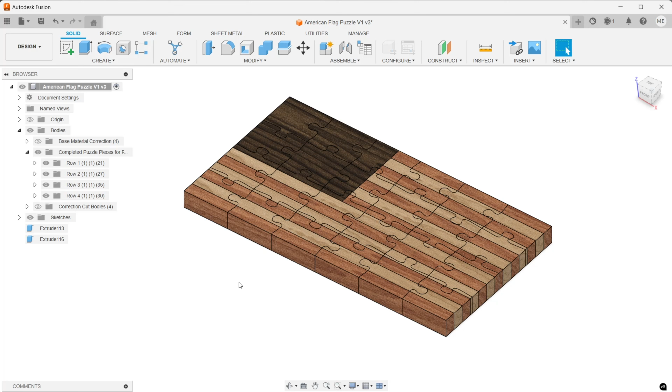So let's go ahead and get started, we'll jump right into it. I'm going to take the top face of this material and build a box, then extrude that into a solid that I'm going to model against, replicating this minus all the other components that make up the American flag.

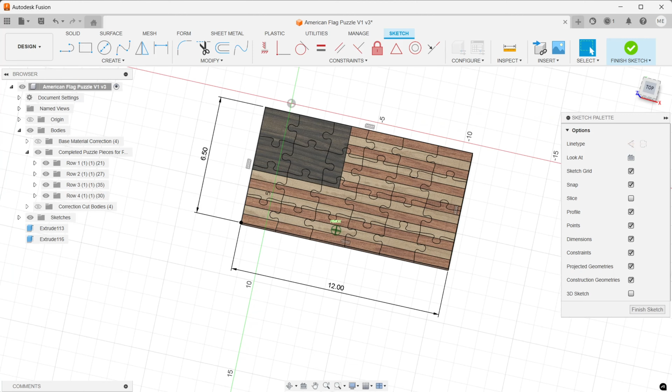I'm going to hide the American flag now and keep my base sketch, then extrude this down. Right now I'm gauging my overall thickness to be 3/4 of an inch. Hit OK on that.

This will be my sanity check on replicating this without touching the rest of it. So let's go to Form - there are multiple ways you can do this in Fusion, but this is the simplest, easiest thing I can do, and I've gotten really good results with the mesh it produces.

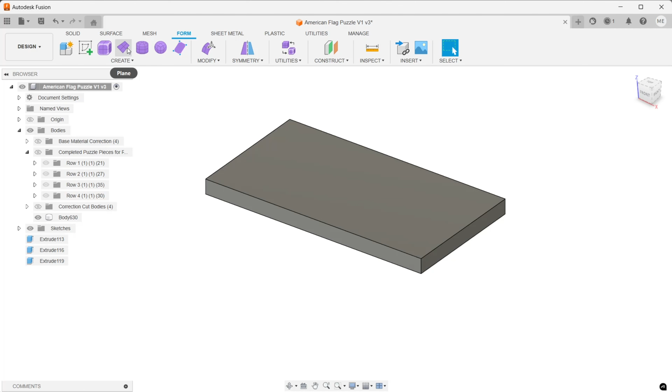So what I'm going to do is create a plane and select that top portion of the face, then build my overall dimensions of the box, and this automatically produces a grid system. You really want to keep this simple, because the more grids and points you have, the more complex and uneven things get when you start pushing and pulling - it's just harder to manage. So I'm going to bring this down to 5x5, which gives me little boxes across this plane that I can manipulate over time. That actually looks pretty good, so we'll hit OK on that.

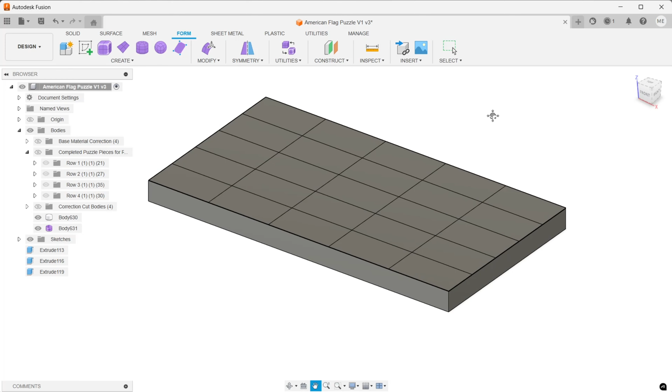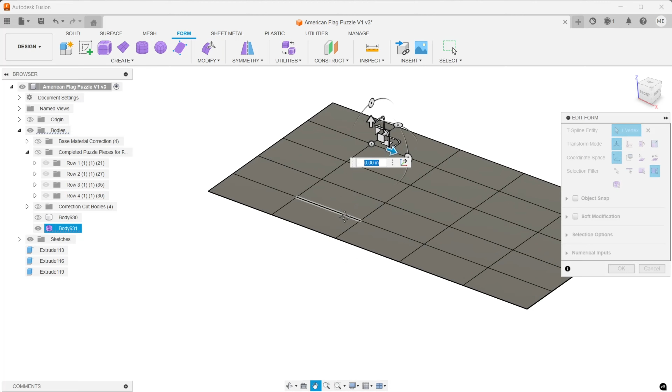Now with the edit form function, you can edit an entire square, an edge, a point, or the entire edge of this. Let's go ahead and hide the body we made previously, so now we only have this plane to work off of.

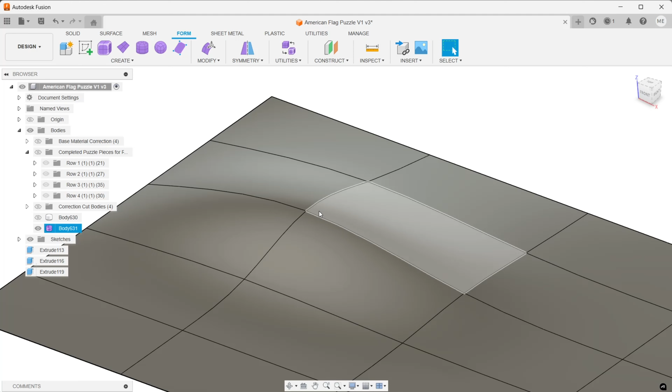So you can push and pull - there's a whole laundry list of edits you can do. Just know that every time you make an edit and release it, it saves that individual change. So this last operation where I pushed it down a little, if I cancel, it keeps the last edit I did within that edit form I just completed. Best thing to do if you don't like it is hit the edit undo button - you can reset everything and continue on with your edits.

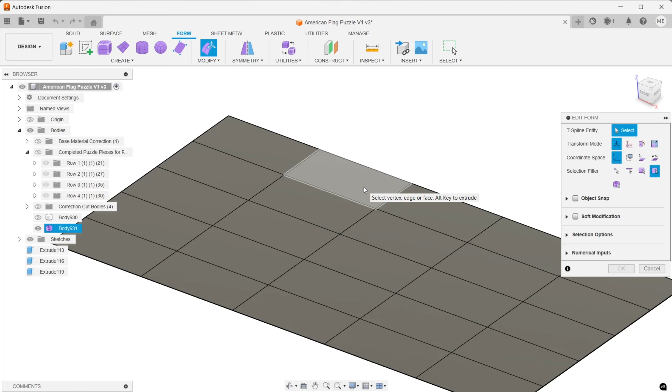So let's start manipulating this. I like to skip every other line - if I'm going to have a valley here that comes up into another valley, I'll edit this line and keep everything else the same. There are multiple ways to do this, you just have to play around with it. The biggest thing to keep in mind, especially for a wavy flag, is you have to keep it organic. You have to make it look like the wind is blowing the flag and the fabric is interacting with that wind. If you have too sharp of curves, too sharp of valleys or points, it won't look natural and will take away from the overall effect you're trying to achieve.

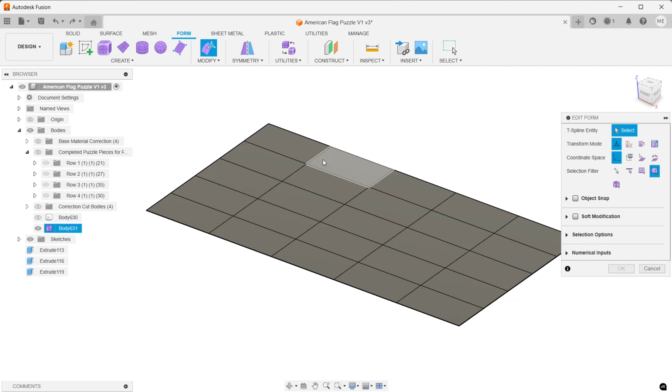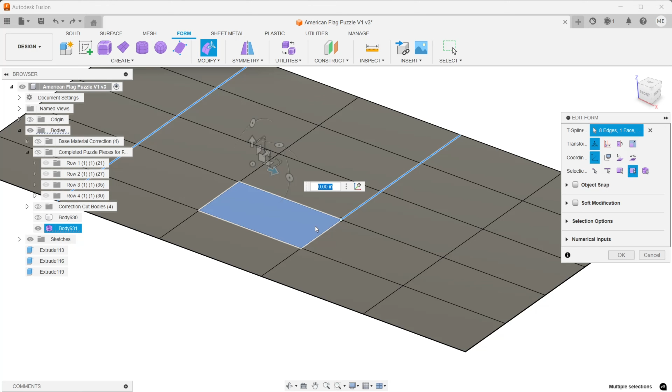So I'm really careful with the amount of edits I do here, but let's start with these two lines. What I'm doing, though you can't see it, is holding my shift key down and selecting each one of these lines. If you accidentally click a face or a point, you can click it again and it'll unselect it. That's all I'm trying to edit right now. I'm going to pull this down, but before I do that, I'm going to do my sanity check.

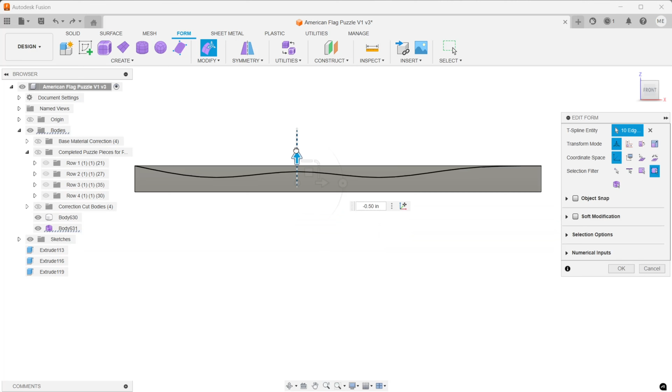And I'm going to look at it from the front view, and I'm going to pull this down so I can see my lines. And that is way too little.

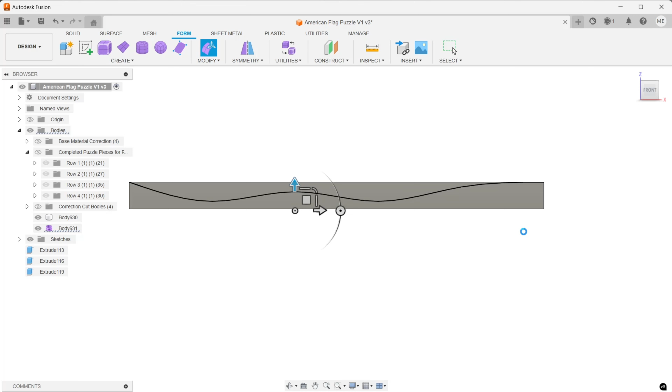Let's keep going down just a little bit more. A little bit more. I want to keep material at the bottom of this, because if you take too much material out of the base material that you're using, it's going to be really brittle. It's going to break, and you don't want to do that. You want to make sure it actually lasts. So always keep in mind the materials that you're actually going to work with in real life. You got to really pay attention to that.

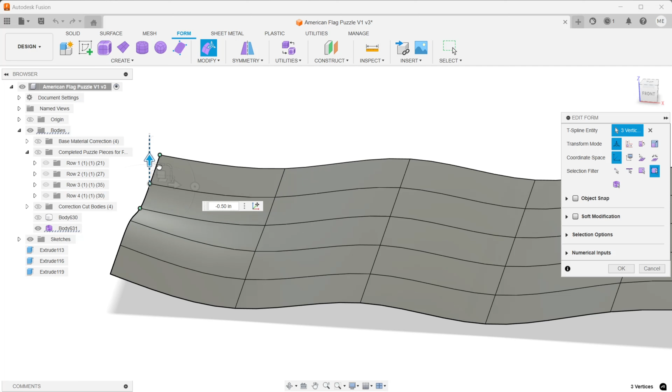All right, so I have just a really nice little curve that's going down and then up and then down. What I'm going to do is I'm going to end up moving these 2 points down, and we'll start getting this kind of effect where we want it. I'm going to bring this way down.

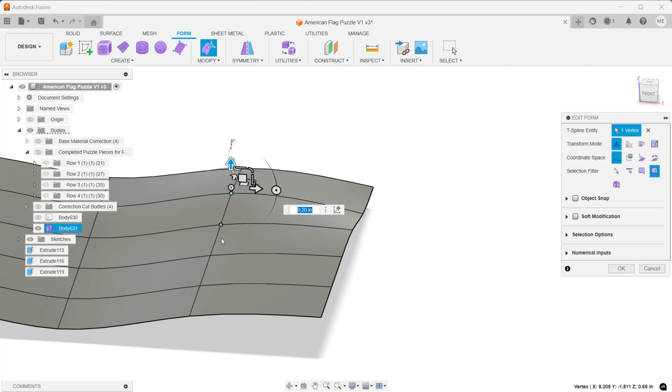Okay, I'm going to do the other edge. I'm going to modify these 2 points. Bring that down. I'm going to bring this up just a little bit. This and this are going to go down.

And you can start seeing that it's starting to look like something, but there's a lot of work that still needs to be done here. I'm going to take these 2 points and I'm going to bring these down.

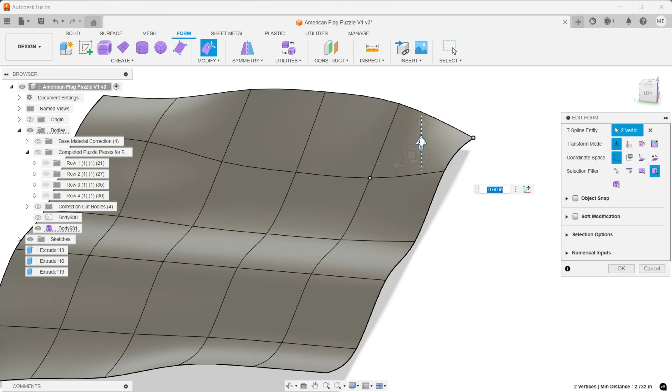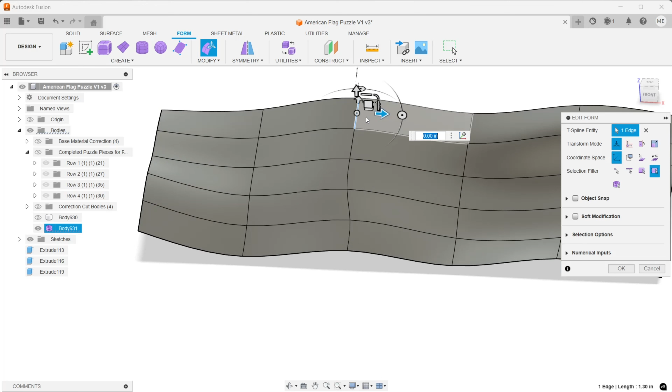Now what I'm going to do is I'm going to move this over to the left. I'm going to move this over to the left. What it's doing is just slightly changing that. Now, what I'm going to do is I'm going to add an additional line here.

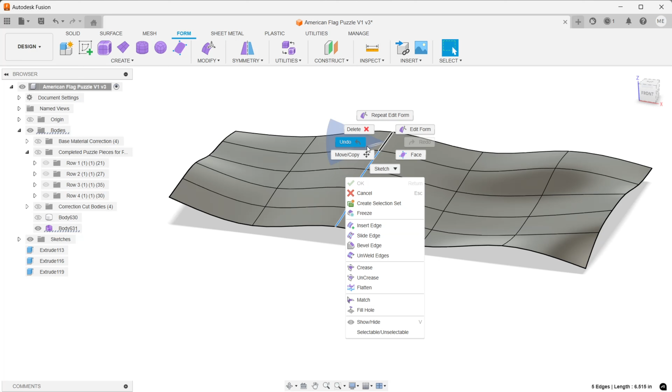Now what I'm going to do is I'm going to right click, and I'm going to insert edge, and it's going to insert another edge along the left side of this. Now you can adjust this, but I'm going to keep it all the same. 0.5 is perfect. Now it added an additional edge, and it's starting to even some of that stuff out.

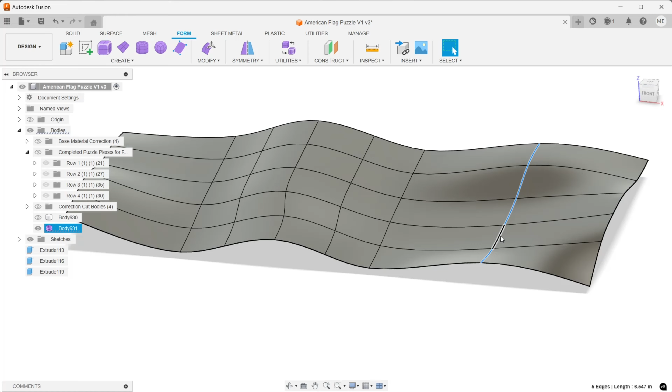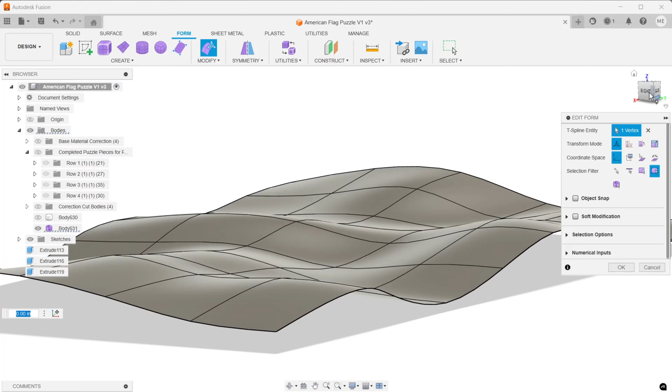All right, so I'm going to speed up the video a little bit. I'm doing the same process. I added lines, both horizontal and vertical, and just kind of kept playing around, but I made sure that profile that I put in on that plane was within that box. And that was really critical. So I was going back and forth, just doing slight adjustments, making sure that it had a really nice even flow between the peaks and the valleys, nothing too crazy. And yeah, honestly, it really only took maybe 30 minutes to kind of flesh that out.

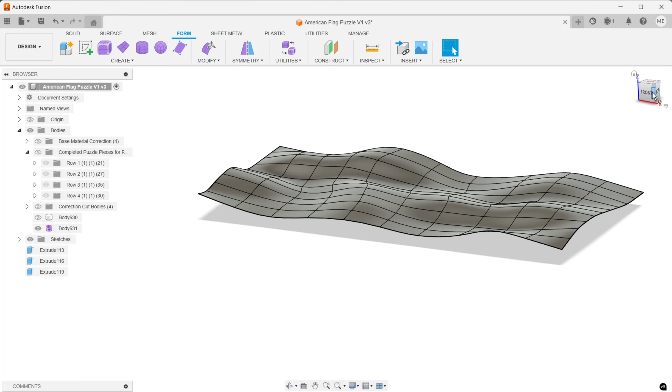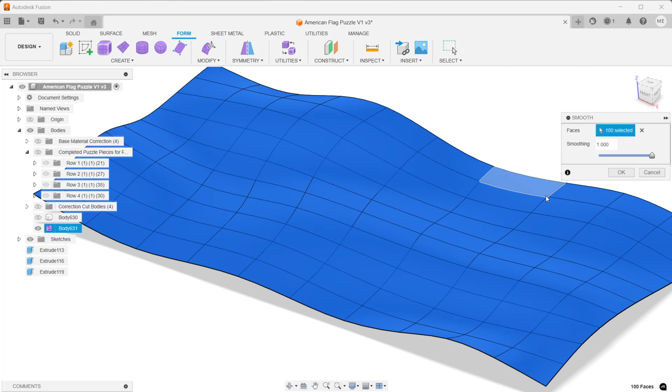All right, I am pretty happy with the movement that I got in here. So now what we're going to do is we're going to smooth everything out. There's still some pretty sharp edges here, but if you select everything and you go to modify, smooth, you can change this up. I'm going to go 1.0 or 1. And that got everything pretty smooth. I'm going to do it one more time.

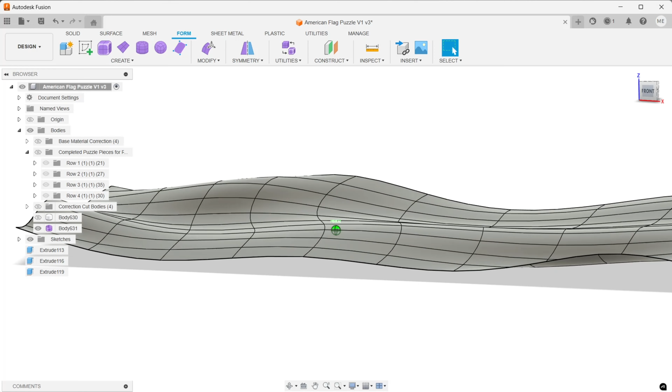Looks pretty good. Let's look. Starting to look pretty good. All right, so this looks pretty good. I'm going to go ahead and convert this, and we're going to convert T-spline to B-rep. Can't tell you what B-rep stands for. If anybody knows, just put it in the comments.

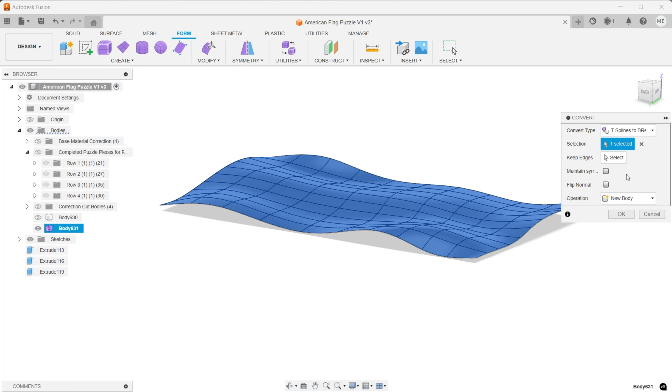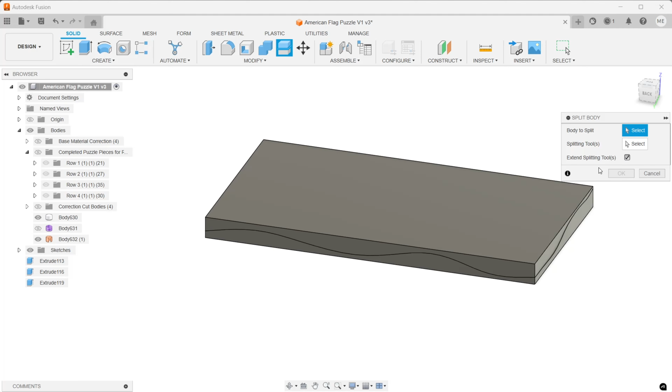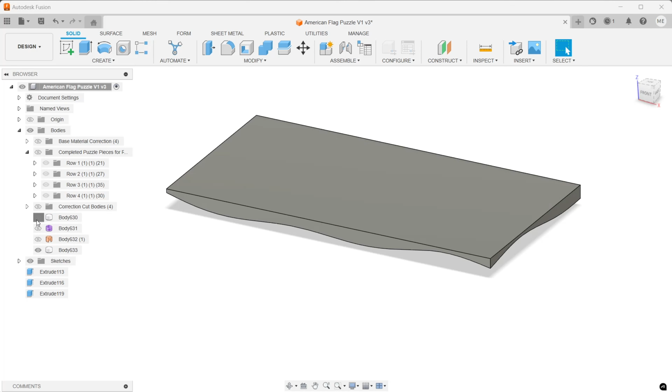All right, so now that we got it converted, I'm going to go ahead and I'm going to split this body with that. So I'm going to put that visible back again, and then I'm going to split body. Now, if this gives me an error, we might have to modify this just a little bit, but the body to split is this, and the splitting tool is going to be this mesh. Now, what it did was it sliced that along the plane, so I'm going to hide my mesh, and I'm going to hide that top portion. Now, I have my 3D profile, and that looks pretty good.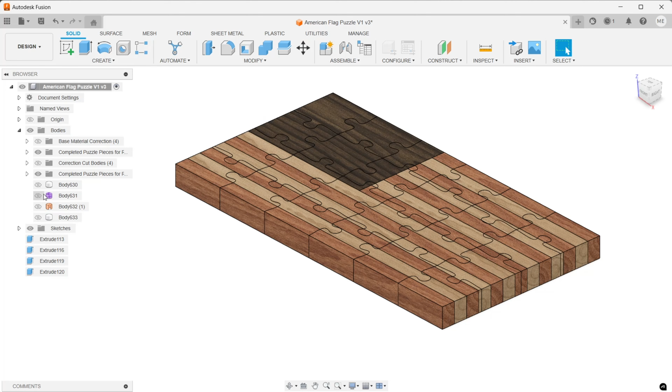So now what I'm going to do is I'm going to go back to my 3D render of all my puzzle pieces, and what I'm going to end up doing is I'm just going to make a copy of all these. That way I don't mess around with all the rest of my stuff here. Let's hide this. Let's make sure this is all the way through. It is.

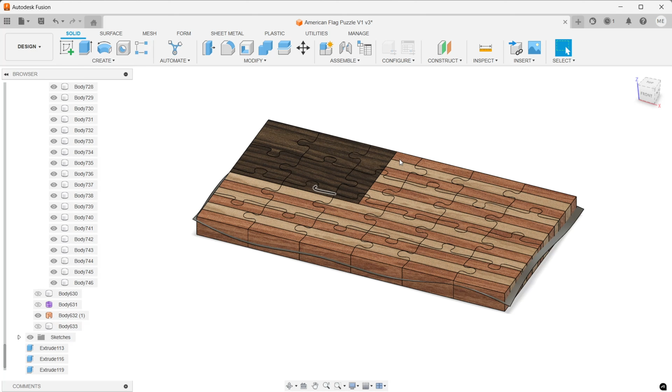Now let's split it along all of this. This is going to be kind of... I wish Fusion you could just select this entire group of bodies, but it doesn't allow you to do that. So I'm going to open up all these individual ones, and this is more for just rendering purposes. In the toolpath generation, it's a lot easier. But when I do my render of how this is going to look, maybe put it online, it makes sense. So for the body to split, I'm going to select all these other bodies, these bodies, with the splitting tool.

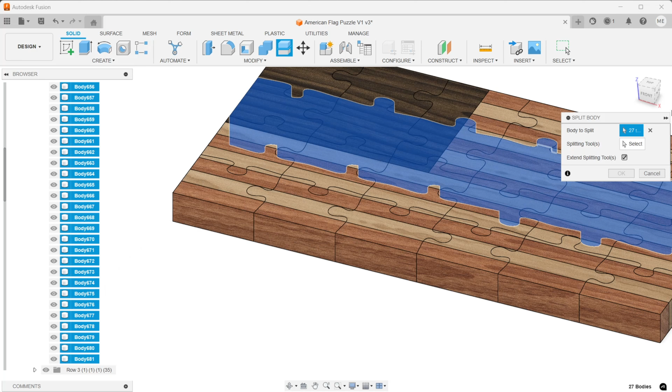That one's done. Row 1, row 2, row 3, and row 4.

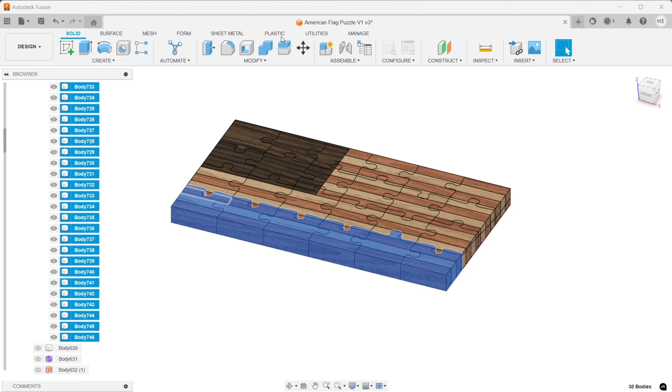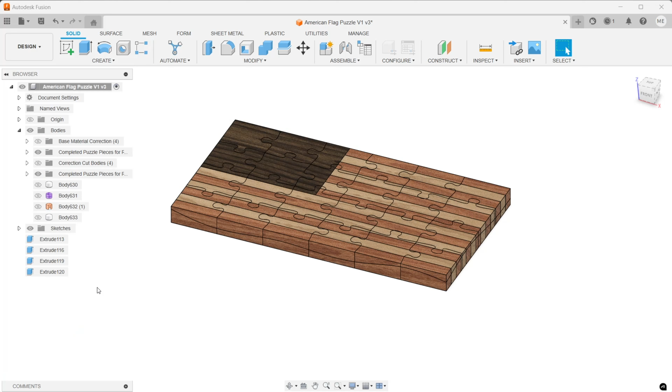Now we just made a ton of stuff here. We'll go through and delete all of these new bodies that it just created. Delete. We'll hide that, and there is our wavy flag puzzle piece. So each individual one is there. That's what it's going to look like.

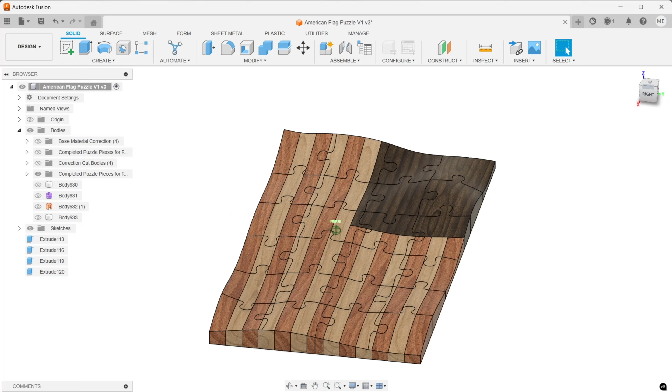I'm digging the wave. It looks really organic and seamless. Nothing really crazy, and I still left some distance here, about a quarter of an inch. I'm comfortable with that.

Yeah, that looks really good, really organic. 0.23 - that's plenty of distance.

All right, so now let's go through and set up our toolpath generation. But before we get into the toolpaths, let's just take a piece and move it out just to see.

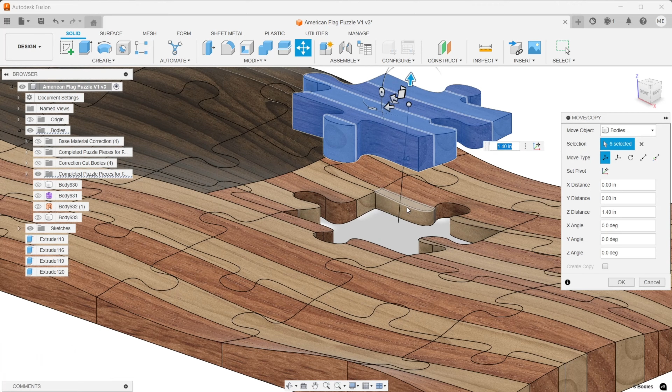As you can see, the pieces are very unique. And when you cut that profile in, it just looks super cool. So that's what each puzzle piece will look like.

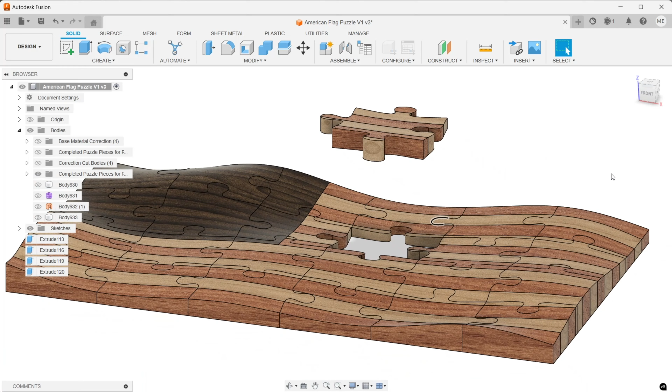Very subtle - some will be subtle, some won't be. But they're thick enough to make sure that these edges don't break off.

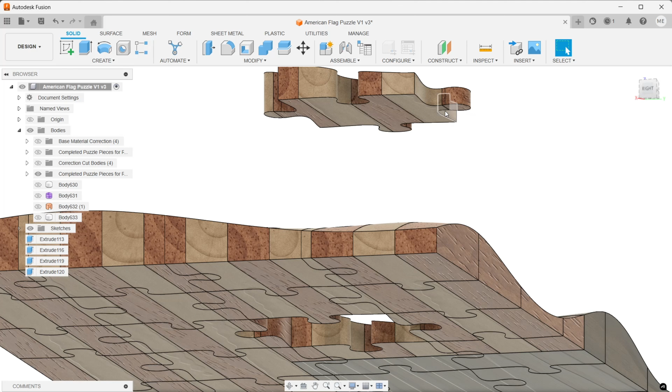And that's why when I build this thing, I'm going to be really careful. I'm going to make sure all these edges are very clean, with a really good glue seam. Probably what I'm going to do is put veneer backing on this just to strengthen up each one of these joints. I'm really going to have to do that for the union and the rest of these stripes.

That's one piece right here. And gluing end grain to end grain, that's really just not a strong joint. So having another plane worth of glue and some material there will really strengthen that out. But that looks super cool, so I'm really excited to get into the garage and start doing this.

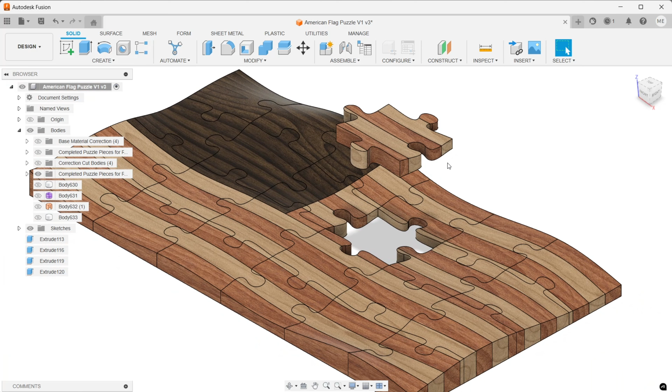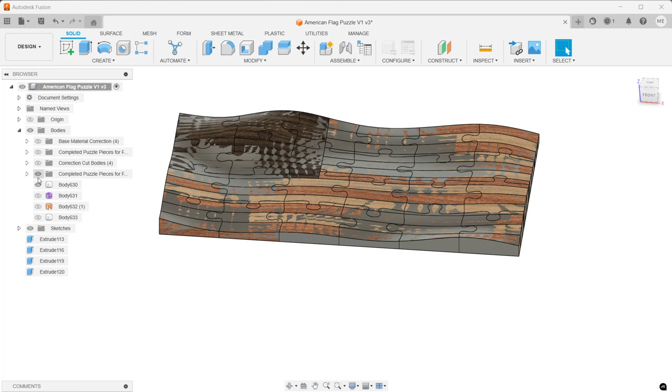But let's hit the undo button and start with the tool path so we can actually cut this thing out. Because I know that this body is the same as this - these two are exactly the same. I'm going to go ahead with this as my body that I'll cut and do all the tool pathing off of. So from here, in manufacture, let's go ahead and start a new setup. Let's select this body.

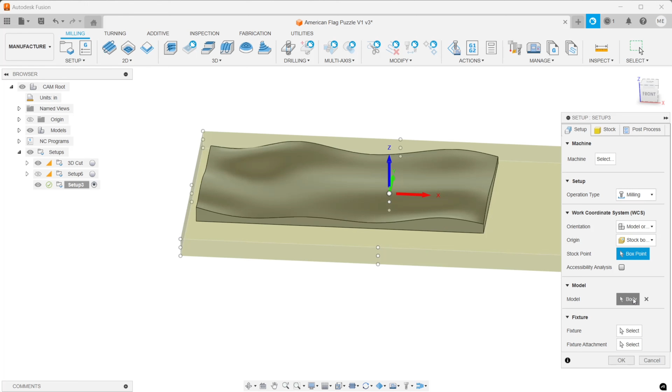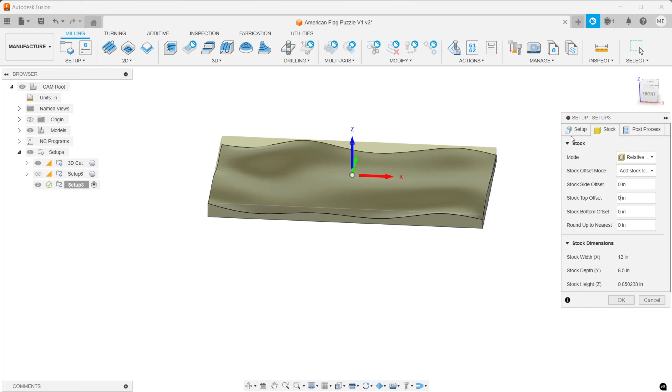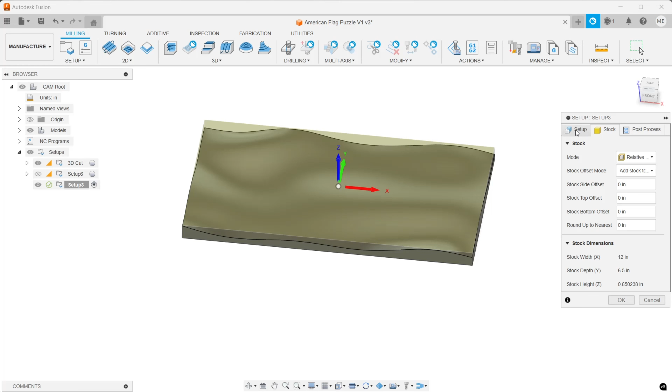And then for relative box size, I'm going to set the offsets to 0. Now you can see my overall dimensions of my material is 12 by 6.5. I'll make sure that I center my 0, and my X, Y, and Z axis are all running the same as my machine. So when I set this into my machine, the union is right here and the rest of the stripes are here. That gives me exactly where it needs to be when I put it in the machine.

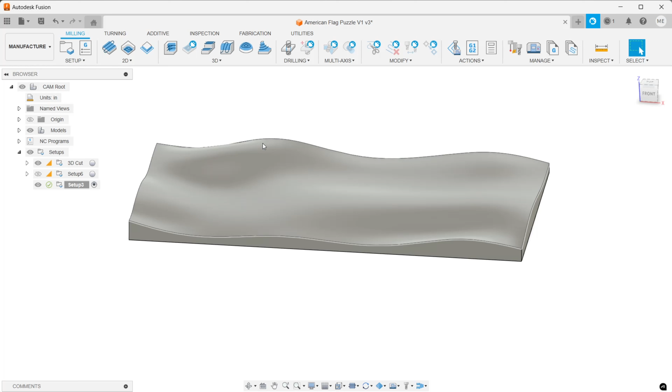I used to run two tool paths, a clearing operation and the actual 3D ball nose operation. I've come to realize that the clearing operation, if it's not deep - like a quarter inch to half an inch - there's really no reason, especially if you're using a tapered ball nose bit, to do a clearing operation. So I'm going to go ahead and just go right into the 3D profiling with my ball nose.

So when I select that parallel tool path, I'm going to select my tool. All my presets are already in here - I've been experimenting with different cutters. This is my go-to 1/8 inch bit, and it's a tapered ball nose.

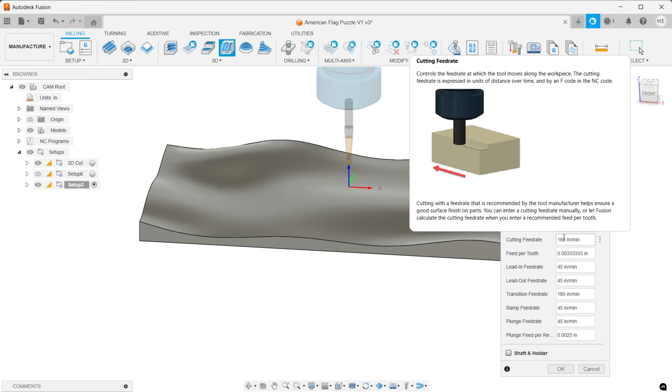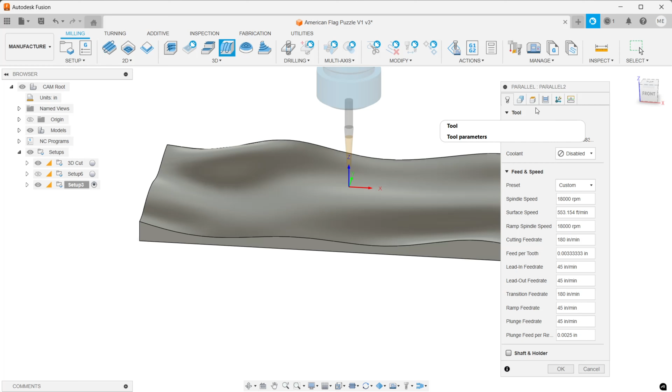I'm going to set this to disabled, and I'll set this to 180 inches per minute. I can dial this back in my motion software by certain percentages - so if 100% is 180 inches per minute, I can automatically set it to 70 and it will stay at 70, which is probably 100 inches per minute. Then I can dial it up depending on how that tool reacts with the material. So I'll leave it at 180.

And then for geometry, I'm going to go ahead and select selection, and this will be my bounding box. So my tool will stay within this box and it will machine everything inside of it.

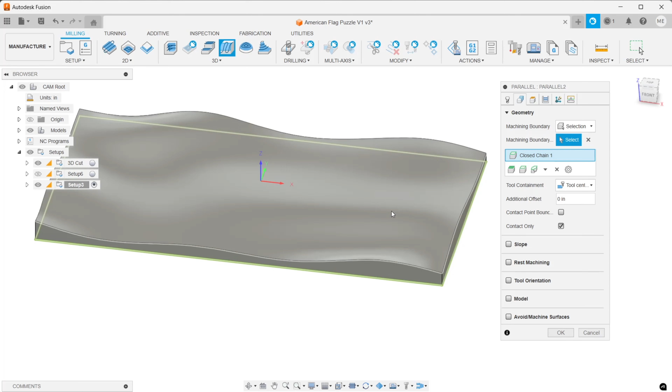Don't have to change anything here. The clearance height, retract top, bottom height, all that remains defaulted. I never have to change anything. What I'm going to do is leave my step over at 0.01. I think that's going to be enough, where I won't have too many crazy lines or anything like that. Nothing else changes here, and my linkages, everything stays the same.

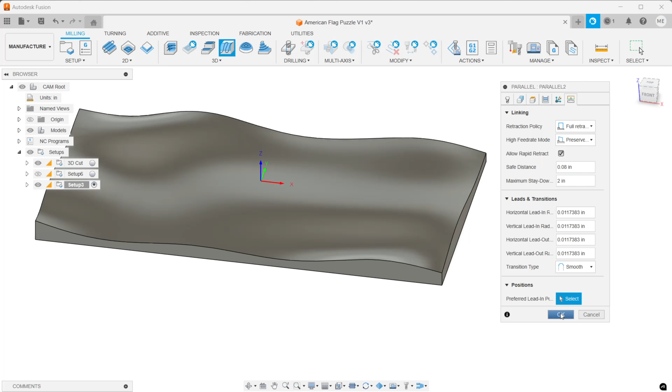So we'll hit OK and we'll run it. So this is a 43-minute cut, and it cut my entire profile. So let's go ahead and simulate this.

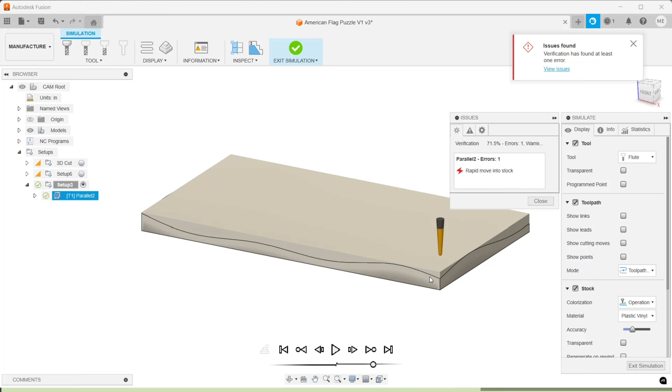Now, this was an update in Fusion. I don't understand it—rapid move into stock, got it. Yeah, that's not a huge thing. I don't know why it's erroring out like that, but I've noticed this last update it's funky, and I've run a couple toolpaths with this error and no issue. All right, let's run it.

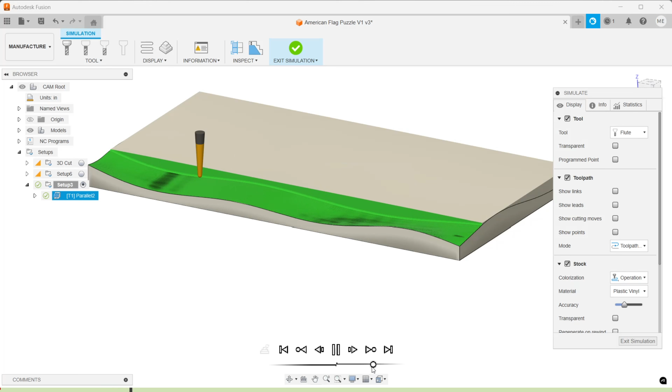Now you can see that step over where those lines are. I can decrease my step over to kind of nullify that. It all depends on how fast I want to run my machine, and if I'm okay with sanding, it's kind of a no-brainer.

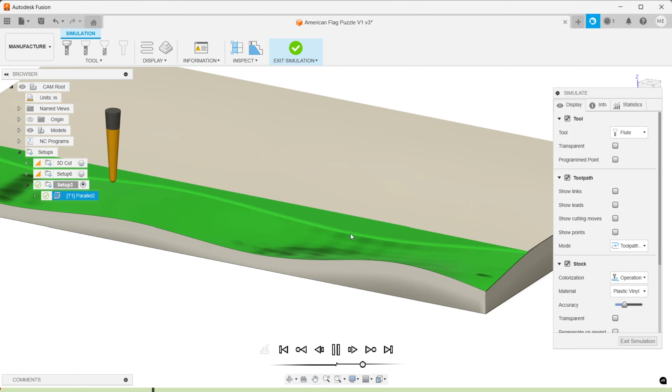What I'll probably do is decrease my step over just because I'm cutting those individual puzzle pieces, and I'm going to slam those down really, really tight. When I put it into the machine, if it's loose or it hits an edge, there's a chance an edge might break off or chip off. So I'll play around with that, and when I actually cut all the puzzle pieces out, I'll see exactly where I want that to land.

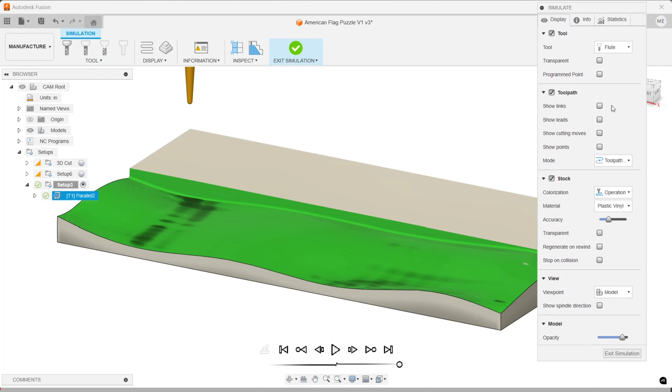So right around 43 minutes, and it looks pretty good. We'll go all the way to the end here. All right, I don't see anything crazy.

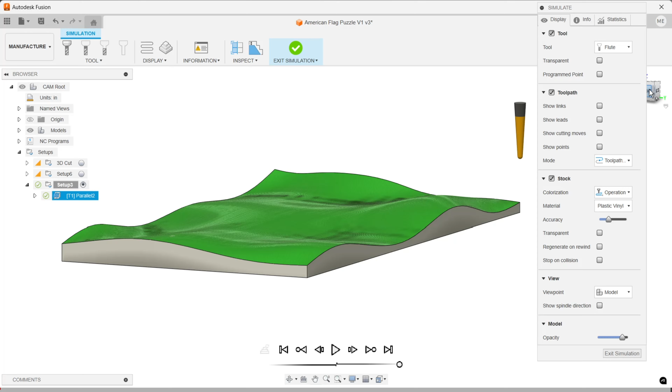And that profile looks really good, so organic. I could probably play around with this just a little bit more and have some more valleys, and maybe bring this up—this looks like it needs to come up a little bit because it looks just a little bit flat. But again, it has to be natural. You don't want to get too crazy with anything like that. So everything looks good, I'm pretty happy with that.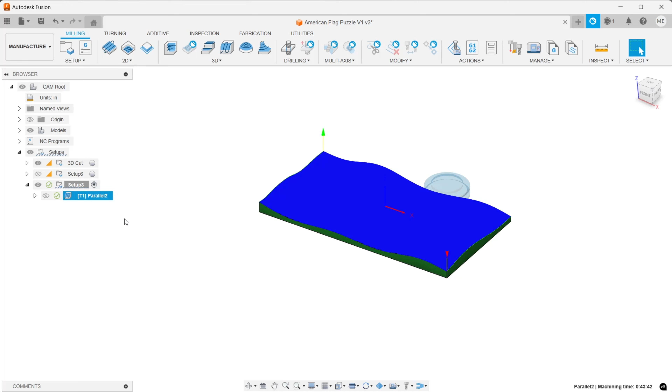But if you noticed or had questions about how I actually cut these squares out, or the puzzle pieces, this is going to be its own tool path. So I'm going to go through and cut this on my machine before I do that 3D pass.

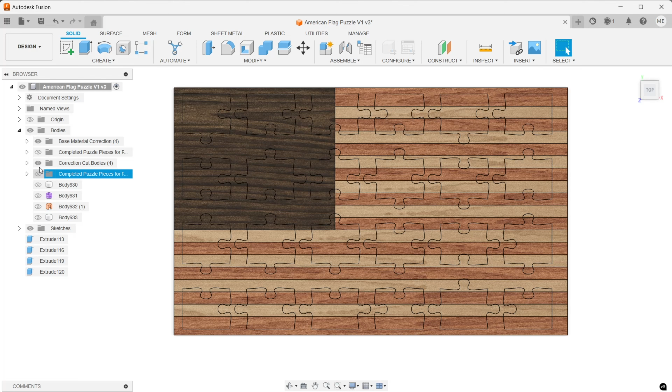So here's the puzzle pieces within the base material that I'll cut out. I'll take an eighth inch spiral down cut and cut all these pieces out here. They're all aligned to where I can cut it all out at once. And then when they're all cut out, it will come in and be this right here when it's all put together. And then my second tool path will be this 3D profile cut that I just did.

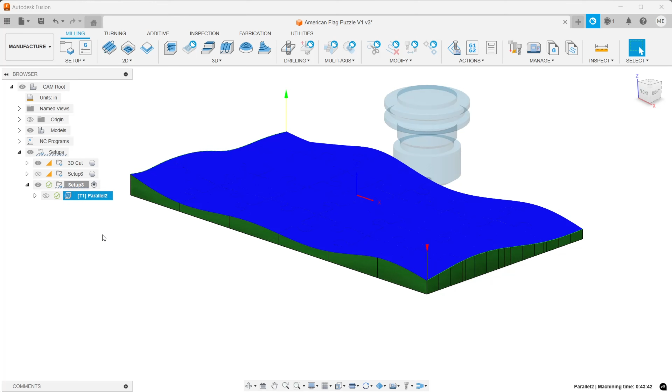So this thing is ready for post-processing, and it should be good. So I'm really, really happy with how this is going to turn out, and we'll see if it actually makes it.